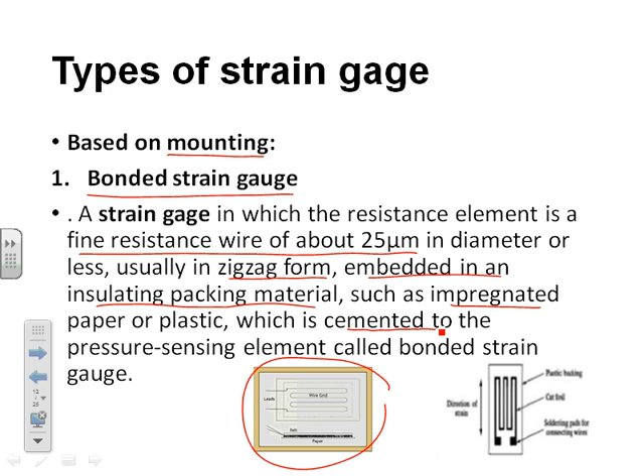There is a figure for the bonded strain gauge. Again, it's fine resistive wire of 25 micrometers, so that we can stretch the wire corresponding to the applied pressure. This is in the form of zigzag or embedded. Embedded means this is in a pack. It is called embedded. And this type is called bonded strain gauge.

So here, any change in surface dimensions of the structure due to mechanical strain are transmitted to the resistance wire, causing an increase or decrease of the length and corresponding resistance change. We saw the working principle of strain gauge in the last class. According to that principle, if any stress or strain is given to the surface, this wire will cause decrease or increase in its length, which will cause the resistance to change. The bonded strain gauge, therefore, is basically a transducer for surface strain.

So it can be used to measure the surface strain, a transducer which is used to measure the surface strain. Any change in surface dimensions of the structure due to mechanical strain are transmitted to the resistance wire, causing an increase or decrease of its length and corresponding resistance changes. This type of strain gauge is called bonded strain gauge.

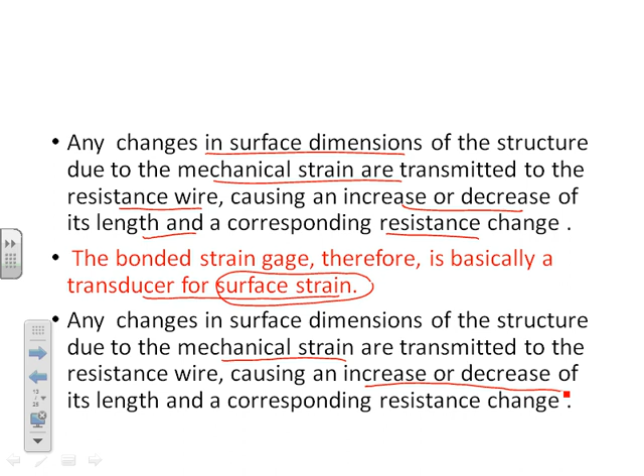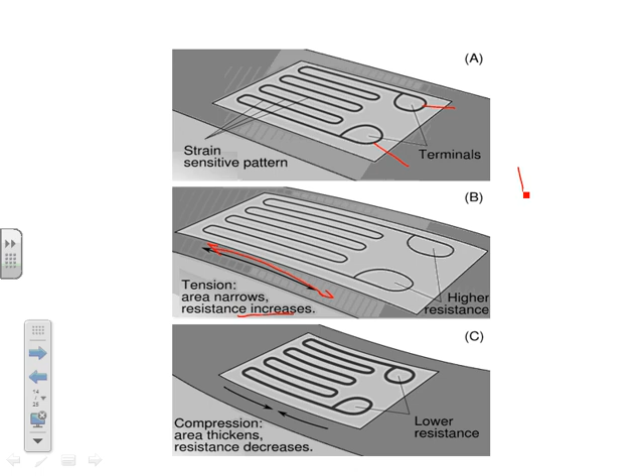We see some figures here. The strain sensitive pattern is given here. This is a zigzag pattern. These are two terminals. Applying tension, the area narrows and resistance increases. Here we apply the tension like this, so the area is narrowed and the resistance increases. The length of the wire is increasing, so the resistance is increasing according to our law, that is, R is directly proportional to length and R is inversely proportional to area.

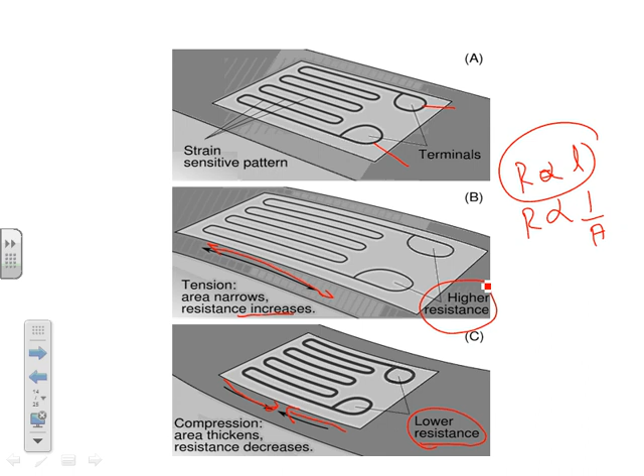According to this principle, the resistance is increased. Where there is compression, like this, there is a compression on this side and this side, resistance is decreased, lower the resistance. Where there is tension, higher the resistance. So this is the principle of bonded strain gauge. This material is bonded or adheres to the surface of some material, that's plastic or some type of material.

So this strain gauge consists of three parts. The first one is the base, called base material. Several types of base material are used to support the wire. The base material is mainly used to support the resistive wire, which is supported by the base or carrier material. Impregnated paper is used for room temperature applications. The base supports the wire.

Other materials, epoxy material, is used for 200 to 150 degree centigrade. Bakelite impregnated cellulose or glass fiber filled materials are used up to 200 degree centigrade for continuous operation and up to 300 degree centigrade for limited operation. So depending upon the base material, operating temperature also varies. We also see that the characteristics are independent of temperature. Strain gauges are not that much dependent upon temperature, and there are three types of base material for temperature range: at room temperature we can use impregnated papers, epoxy, cellulose, or glass filled materials.

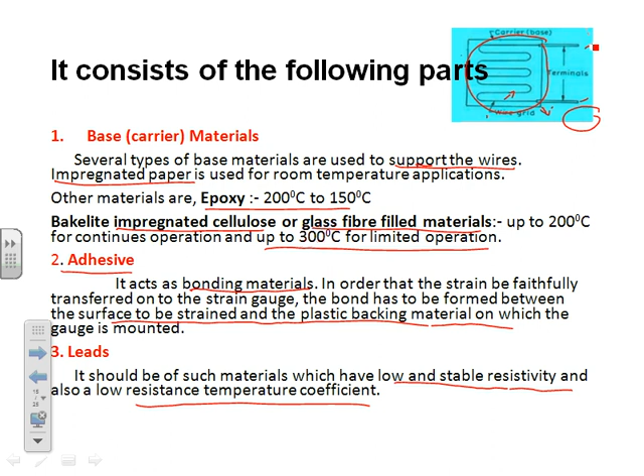The second one is called unbonded strain gauge. The arrangement of unbonded strain gauge consists of the following.

There are two frames, P and Q. Frame Q is here and frame P is here, carrying rigidly fixed insulated pins as shown in this figure.

These two frames can be moved relative to each other, and they are held together by a spring loaded mechanism. These two frames are moved relative to each other so that there is a stretch in the resistive material, and a strain gauge will be stretched around the insulated pins.

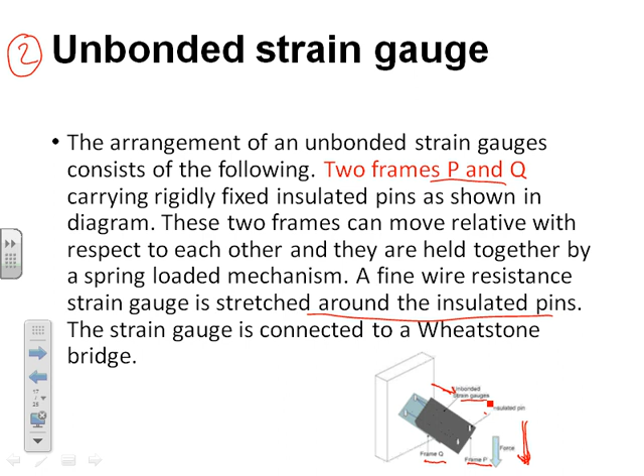The strain gauge is connected again to Wheatstone's bridge. If you apply a strain force here, there will be a stretch. Due to this, if force is in this direction, there is a stretch in this strain gauge, which will vary the resistance, and that variation will be measured by using Wheatstone's bridge.

When the force is applied on this structure under study, that is frame P and Q, P moves relative to Q. Due to this applied strain or force...

the strain gauge will change in length and cross section. When the strain gauge is strained in this way, that type of strain gauge is called unbonded strain gauge.

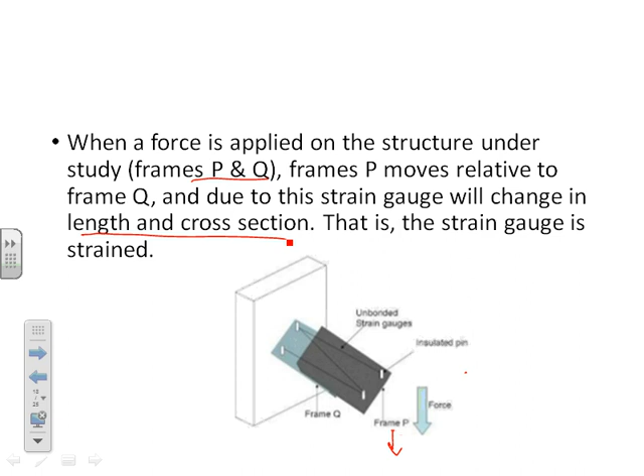In the bonded strain gauge, this material is adhesive to the base material. Here, in the unbonded type, it is not adhesive, so it can be moving. That is the unbonded type.

The strain gauge resistance change of the strain gauge is measured by using Wheatstone's bridge, as shown in the figure.

This is calibrated to become the measure of the applied force. These are moving parts. Two branches are there, R2 and R3. R1 and R4 are permanent.

So by applying some pressure, this moving member will be moved left or right, so that this material is stretched and equivalent strain can be measured.

If there is no force applied, this galvanometer will read 0 volts. If a stress or strain is applied, then corresponding to this, there is a variation in this galvanometer, and that is equivalent to the applied force.

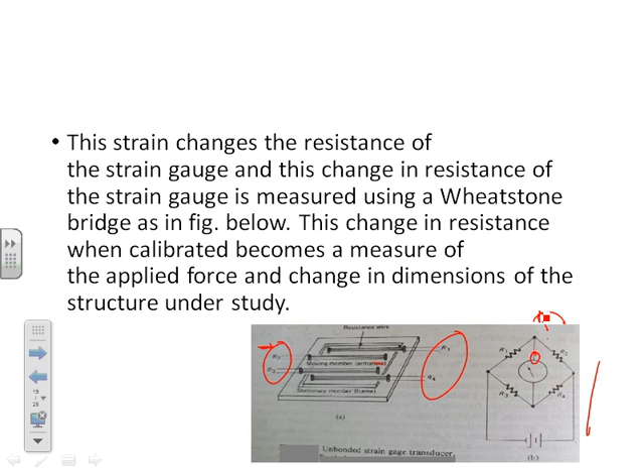So this is the basic of unbonded strain gauge. For unbonded strain gauge, this figure also shows the unbonded strain gauge.

There is a diaphragm here. We apply the pressure, and according to this plane, when this force is applied, this structure will vary, and correspondingly the strain of the strain gauge will vary.

This is connected to a Wheatstone's bridge, and by the variation of the output voltage we can calculate how much pressure is applied on the strain gauge.

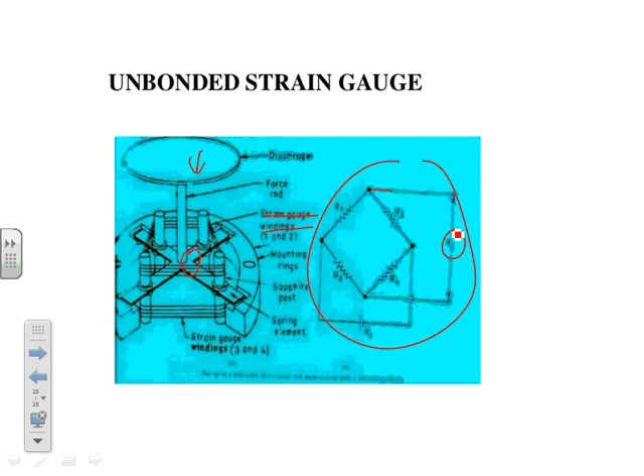The applications of unbonded strain gauge: it is used in places where the gauge is to be detached and used again and again. Unbonded strain gauges are used in force, pressure and acceleration measurement. They can also be used in vehicles.

Advantages of unbonded strain gauge: the range of this gauge is equal to plus or minus 0.15% strain, and this gauge has very high accuracy. The limitation is that it occupies more space.

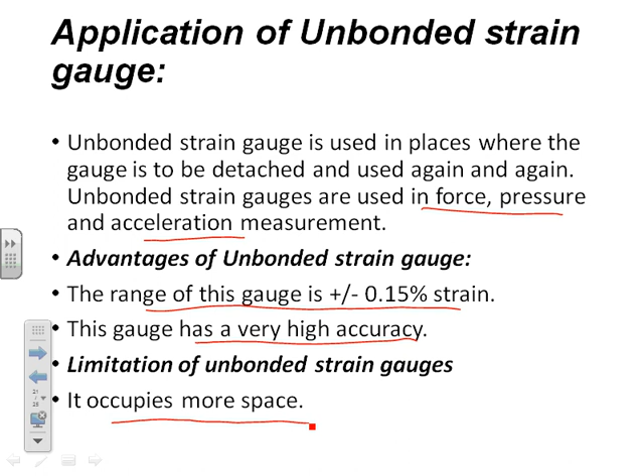So these are the two main types of strain gauges we are studying in this syllabus. Based on the principle of working, we can also classify strain gauges into mechanical strain gauges, which are used to measure mechanical pressure or strain.

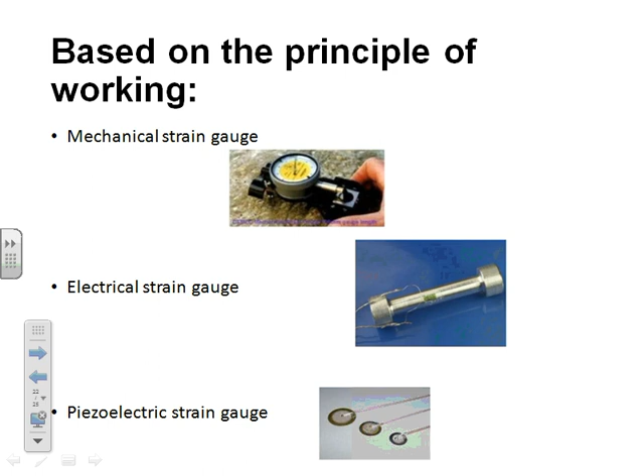Electrical strain gauges, and piezoelectric strain gauges, that is piezoelectric crystals are used to measure the strain or pressure or temperature, whatever may be there.

Based on construction, foil strain gauges are there, semiconductor strain gauges are there, photoelectric strain gauges are there. So these are the six types of strain gauges.

So in this video, we are mainly discussing the two types of strain gauges, that is bonded strain gauges and unbonded strain gauges, and their working principle.